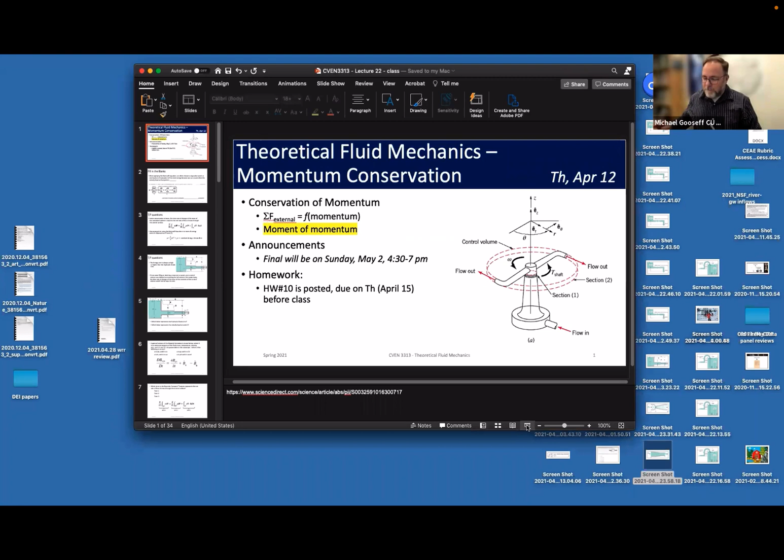Okay, so today we'll mostly... I'll come back to the exam here in a second. So today we'll keep talking about moment of momentum after we get done going through the exam.

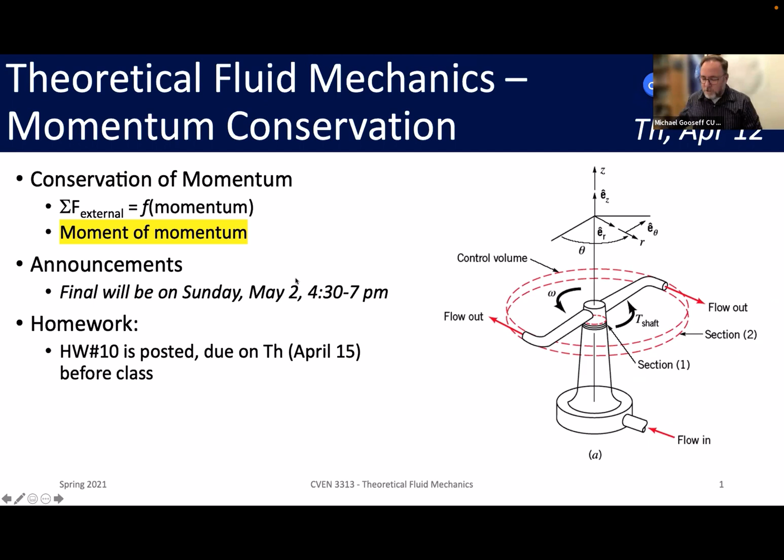Okay, let's see. Well, this kind of works, except I need to... come on now. What happened here? This is weird, now I can't write on this. What happened? Okay, let me try one thing. Oh, there we go, okay. All right, I'm going to go with blue today.

All right, so I'm just going to go through these 18 problems. Remember, you would have only had 10 of them. I can't predict exactly which 10 you had, so I'm just going to go through all of them, and you'll have the benefit of having the ones answered that you had at some point along the way.

I'd say most of these, there wasn't a big problem. One of the issues, let me do this one first in the middle and the second one. These were two different questions, but they had the same graphic with them. The acceleration of a particle is given by the following equation. So this one, the term in dashed outline number 1, right here, is termed the local acceleration. Now, one thing to note: if you typed into the word box 'local acceleration,' the full term, it came up as wrong, because all I was looking for was 'local,' since 'acceleration' was already there.

So I went through and made sure that the things marked wrong were actually wrong. If you had typed local acceleration, hopefully I caught it and gave you the points back. But that's one of the things to check in your exam, just to make sure those are correct.

So I'm checking through these top 10 and then moving on to the other calculation ones, just as a note. A separate question, with the same graphic, asked: if the acceleration of a particle is given by the following equation, the term in dashed outline 2, this one, is termed the convective acceleration.

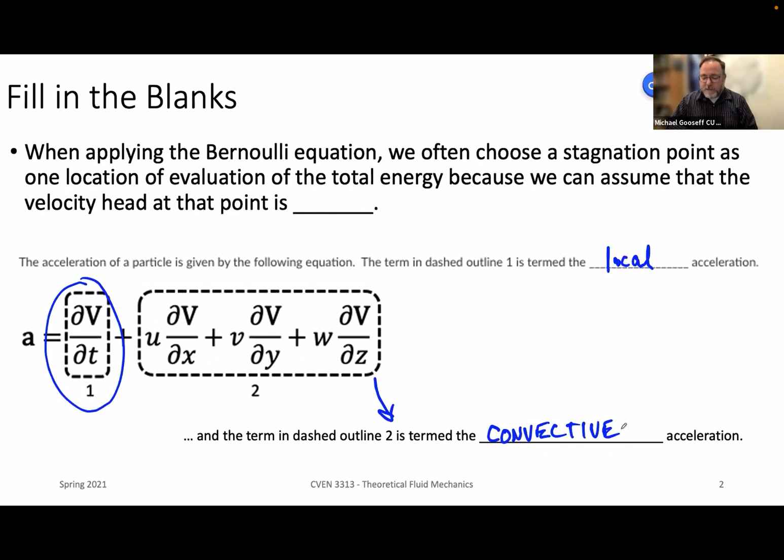And then going back to the first one here, when applying the Bernoulli equation—Christian, do you have a question? Oh, sorry. Oh, okay, all right.

When applying the Bernoulli equation, we often choose a stagnation point as one location of evaluation of the total energy, because we can assume that the velocity head at this point is...

The correct answer to this was 0, or you could have typed out 0. I think both of those were values I had put in as correct answers. Some of you also put 'constant,' and that's not the same as 0, but I might have given 1 out of 2 points for that, something along those lines. Just note that as it comes along.

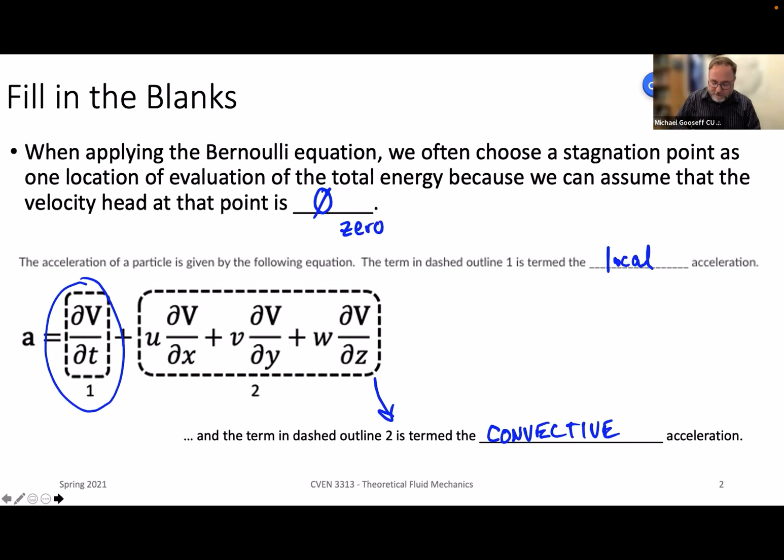All right, true/false questions—there were 4 of these total. These are the first 2; the next 2 are on the next slide.

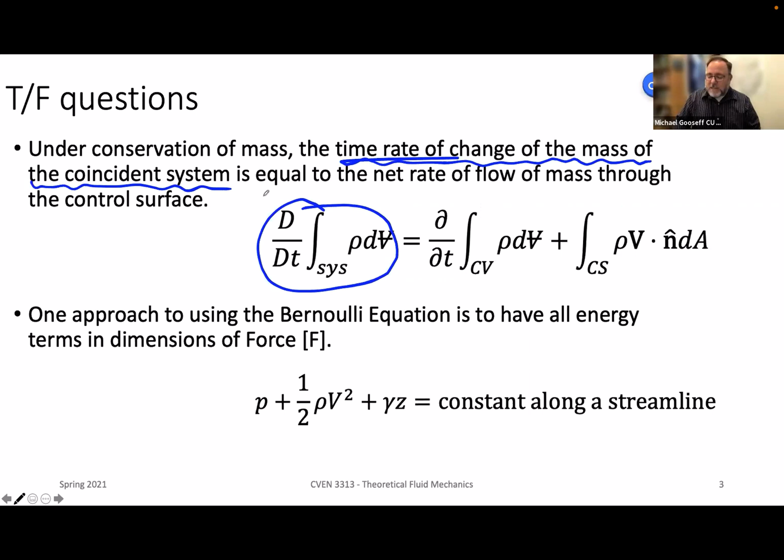Under conservation of mass, the time rate of change of mass of the coincident system—this is the time rate of change of the mass of the coincident system, this piece right here. Those are the words that describe the left-hand side of this equation, the same equation we've been looking at for the past couple of weeks—is equal to the net rate of flow of mass through the control surface, which is this piece right here.

So under conservation of mass, we don't expect any change with time. This would end up being a true statement because you'd expect no change in density with time, no change in storage, so that would be assumed to be 0. I think most of you got that right. If there's some systematic problem I'm not picking up on, let me know and we can talk it through.

One approach to using the Bernoulli equation is to have all energy terms in dimensions of force. I put the F there as a dimension, not as in the answer is false. It turns out the answer is actually false for this one.

Remember we can write this in terms of pressure, which we have right here, and we can also write it in terms of head. The head version is Z plus P over gamma plus V squared over 2g—that's the head version, this is the pressure version. Those are constant along streamlines in either case, just two different versions of the Bernoulli equation, where the translation between the two is basically dividing through by gamma. If you divide p by gamma, you'd get pressure over gamma. If you divide gamma times z by gamma, you just get z, and 1/2 rho v squared divided by gamma gives you v squared over 2g, because gamma is rho times g.

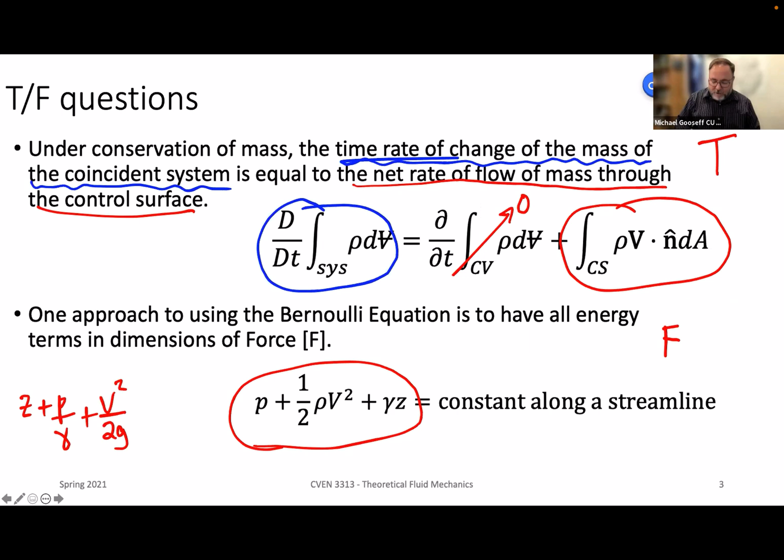But the energy line should never dip below the hydraulic grade line essentially. So this one is true as well. I suppose you could have a negative velocity, I didn't think through that, but anyway, in most systems, this should end up being true.

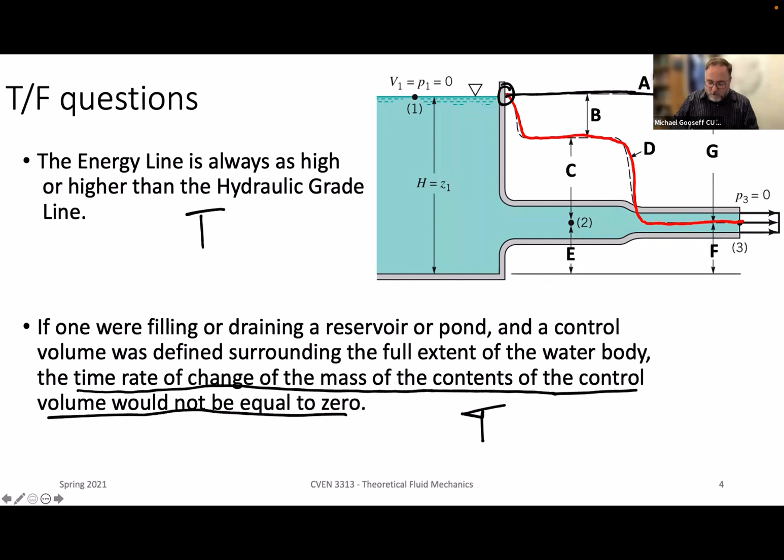There were two different questions that included this graphic, which I showed you previously, but now we specifically look at the answers, basically A through G. The first question was, which letter represents the hydraulic grade line? And the hydraulic grade line is this one right here. The only one that's really identifying that particular line is D.

Then, which letter represents the velocity head at point 2? Here's point 2, and remember the velocity head is the difference between the hydraulic grade line and the energy line, so it turns out that is B in this case. I got a couple of folks that seemed to have a common desire to use G, but that's not point 2, that would be point 3. I'm not quite sure if there was a problem identifying where point 2 was, but in any event, 2 was indicated to be in the larger diameter part of the pipe out of this reservoir.

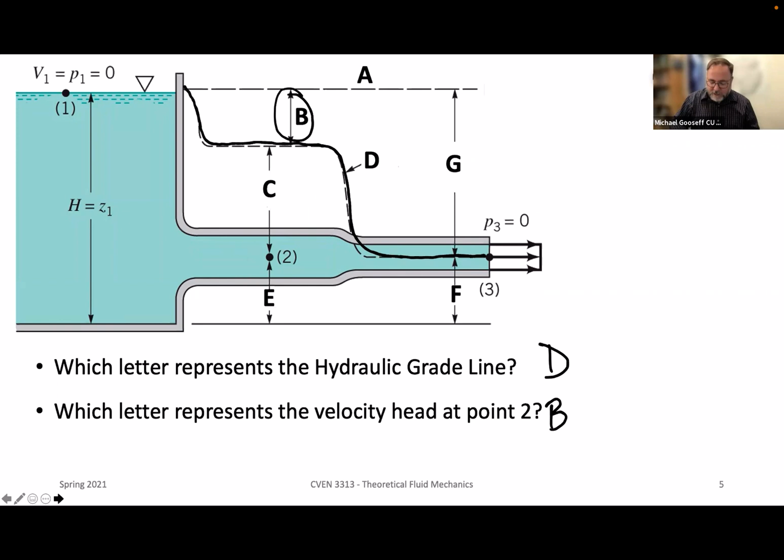This was the graphic that went along with this particular question. The format may look a little bit different, but these are the same answers. I think I took out all the quotation marks you may have seen.

So a general version of the material derivative is shown below, where B is an extensive property of the fluid, so it's mass, temperature, velocity, etc. A and B are placeholders in the subscript, so that's just here and here. Which of the following is correct? A is out, B is in - in other words this would be out, and this would be an in subscript - or A is in and B is out, or should A be sys and B is CV, or is A velocity and B is acceleration.

It turns out, and this just gets back to that fundamental issue that we talked about, where this is derived from that n hat, that normal vector that's always normal, a unit vector always normal to the control surface. Therefore, your outs are added and your ins are subtracted. So this version was the correct answer on that one. That was just getting back to the fundamentals of using the material derivative, which we eventually used to start to define the Reynolds transport theorem, which we'll do in the next slide.

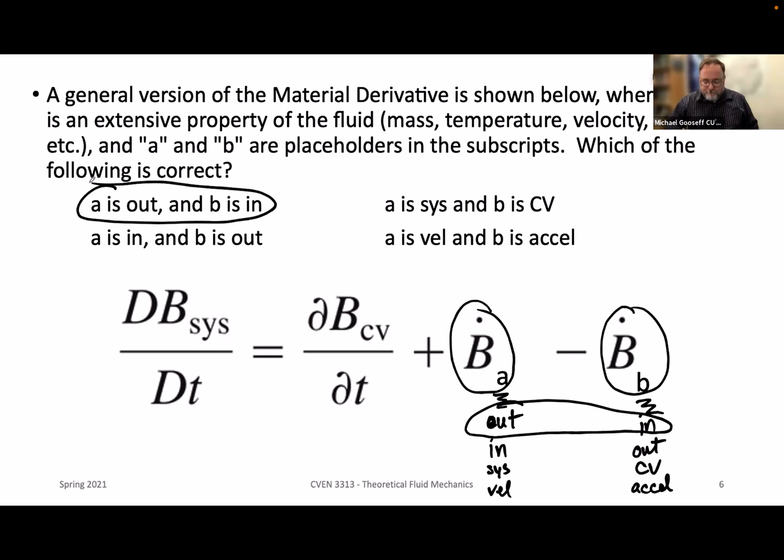On the next slide, we have this question: which term in the Reynolds transport theorem represents the net rate of flow of mass through the control surface? Part of this is given away by using the term control surface. Remember, sys refers to the system, CV is control volume, the control surface is defined here. This is term 3 because remember, this is also that normal unit vector around the entire control surface. So term 3 was the correct answer there - that's the right one for the rate of flow of mass through the control surface.

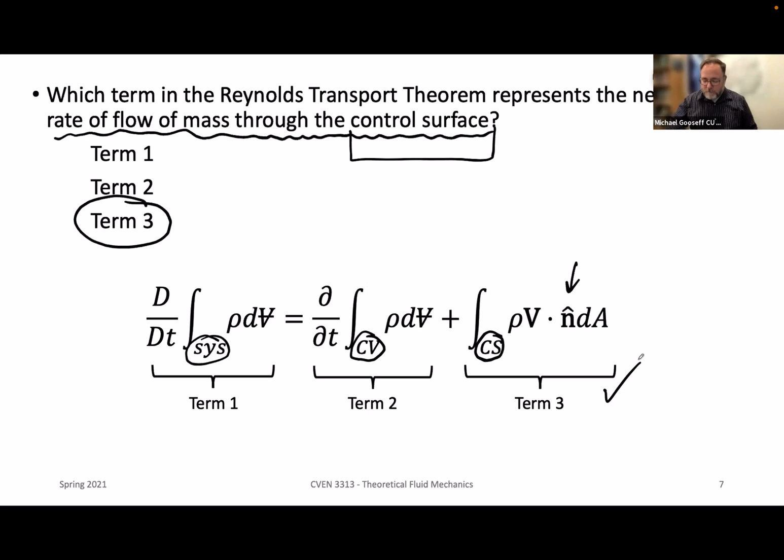This one's slightly different than now.

Which term in the Reynolds transport theorem represents the time rate of change of mass of the coincident system? In this case, we're focusing on the system, so it's term number 1. If we had said something about the control volume, the storage of mass in the control volume, that would be term number 2. But here, we're focused on the system, so we're indicating term 1.

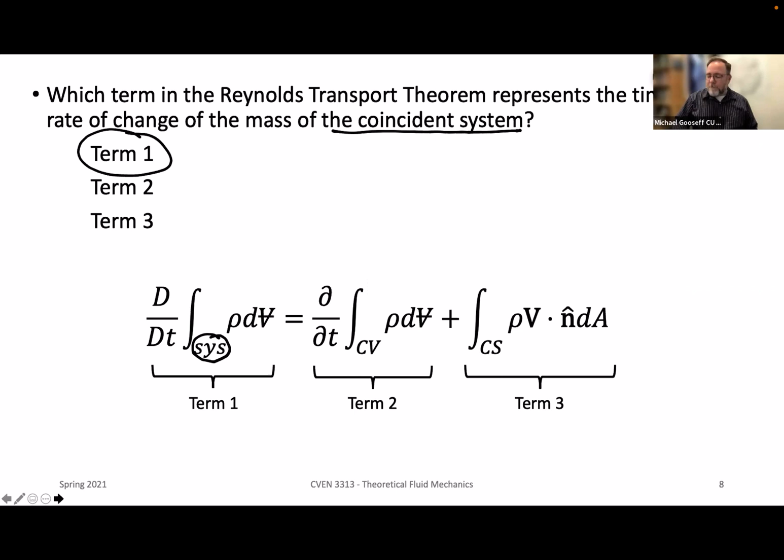Air flows through a doorway at an angle alpha shown in the figure. Which is the correct expression for the mass flow rate, the m dot term? I couldn't put an actual m with a dot on it in Canvas, so I used m dash dot. I hope that was not unclear. This is the mass flow rate of air through the doorway.

If we were to apply the Reynolds transport theorem, remember that we need to look at normal fluxes, that is, fluxes that are perpendicular. Even though this is at some angle alpha from the wall, this in or out flux, we don't know whether it's going in or out, what our frame of reference is.

But regardless, what we're going to need is the normal component. Think about this vector as having that direction and that direction. Given alpha, we care about this component right here, which means we would look at rho times A times V, and then we would only really be looking at the sine of alpha. In other words, the normal component, the component perpendicular to the doorway. That's where the trig comes in here—it's not just rho times A times V, because we have this going at an angle, we need to look at the perpendicular component to that.

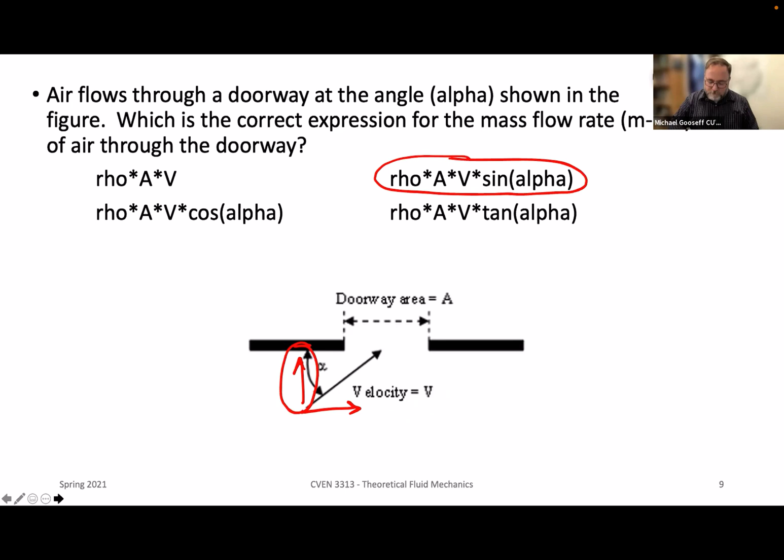You were given this graphic. Again, I had to make these graphics in PowerPoint, do a screen capture, and then upload that as an image to Canvas. You're given a velocity vector of minus 23i plus 1.7j plus 0k. Because this is 0k, we can basically say there's nothing going on in that z direction. Therefore, this ends up just being a two-dimensional velocity vector. I mean, we show the k, but because it's 0, this ends up being a two-dimensional flow, essentially a two-dimensional velocity.

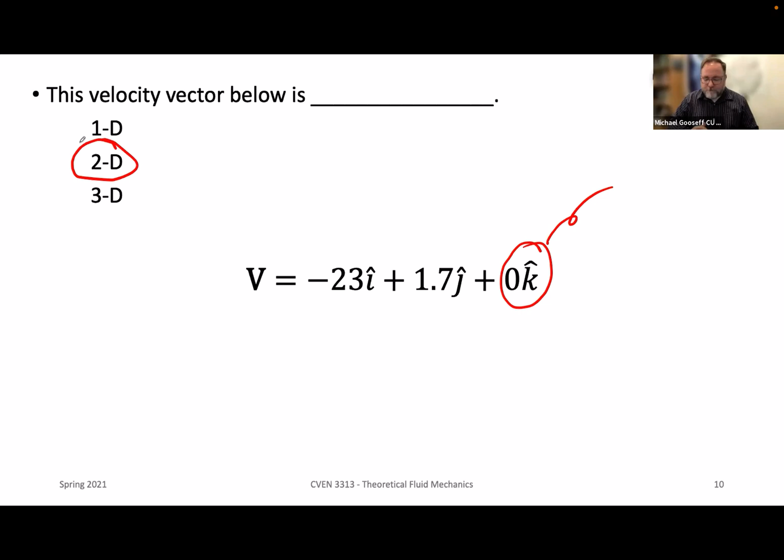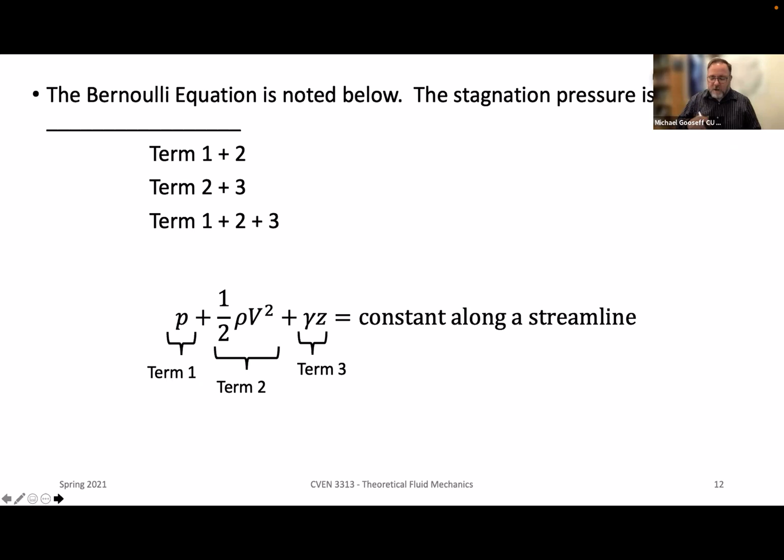So the static pressure is denoted as that P value in this version of the Bernoulli equation. And then the stagnation pressure, remember, is the one that we used for that stagnation point right in front of a manometer that's coming out into the flow.

In this case, it's actually both of these terms summed together. So term 1 and 2 make up what we call the stagnation pressure, because you've got some amount of the velocity head acting against, or velocity energy. Here it's represented as a pressure, not a head, but this pressure is pushing against that opening to that manometer. So that stagnation point has these two acting to push water up that manometer, or whatever the fluid is.

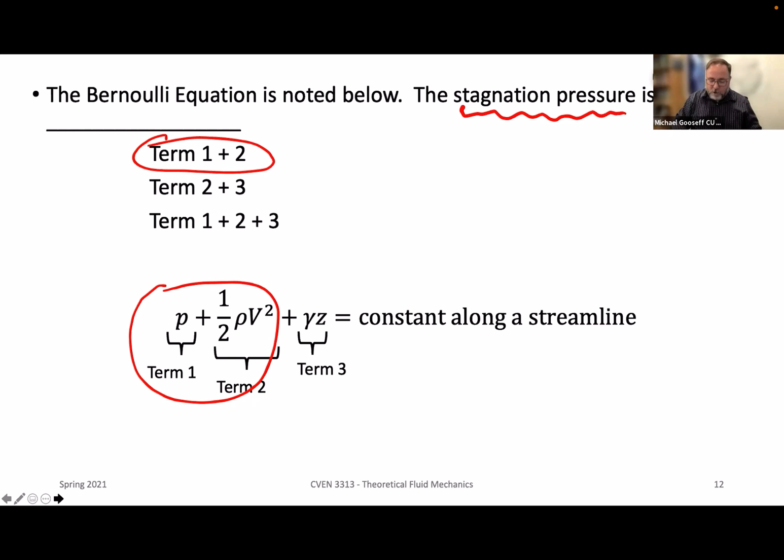Water flows without friction through a horizontal pipe that enters a section where the cross-sectional area is small. Here's point number 1, here's point number 2. The velocity profile is uniform in sections 1 and 2. The correct statement about the static pressure P2 relative to P1, and velocity V2 relative to V1 along the streamline down the center of the pipe, is what?

Before we go through these, let's note that given gravity is downward, Z1 we expect is equal to Z2. So if we think about this in terms of Bernoulli, I'll just write out the equation: Z1 plus P1 over gamma plus V1 squared over 2G is going to be equal to Z2 plus P2 over gamma plus V2 squared over 2G.

We know that Z1 and Z2 are basically the same, so they'll cancel out on either side of this, which means that if velocity changes—if velocity decreases from point 1 to point 2—then pressure has to increase. These two are sort of offsetting each other.

So a decrease from V1 to V2 means an increase from P1 to P2, and vice versa. How are V1 and V2 related? In this case, this is a larger cross section than this one at point 1. Therefore, if A1 is greater than A2, then we know V1 has to be less than V2, right from Q1 equals Q2. We're lumping in a bit of the continuity equation here, and therefore the pressure.

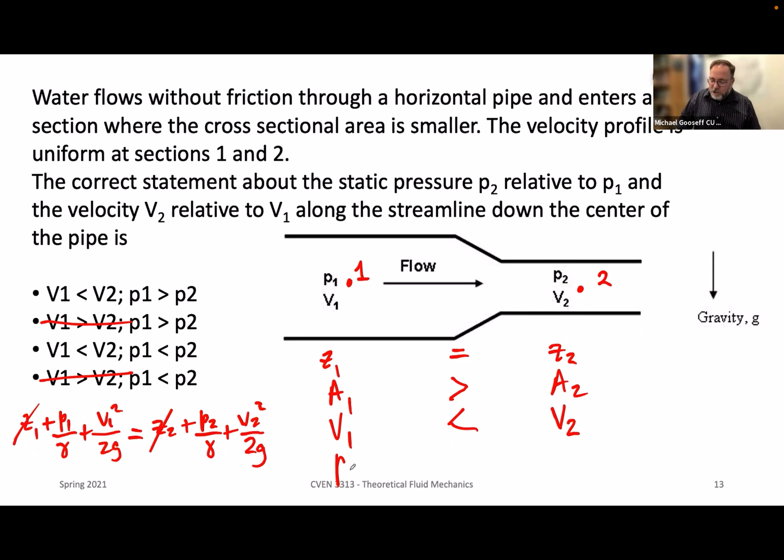So for V1 being less than V2, we can ignore this one and that one. So now what happens with pressure? If velocity increases from 1 to 2, then pressure has to decrease from 1 to 2. So V1 is less than V2, P1 is greater than P2. That's the correct answer here. We can reason through just the relative amounts of these without getting into specific numbers, simply because we can estimate what these relative changes are in the system.

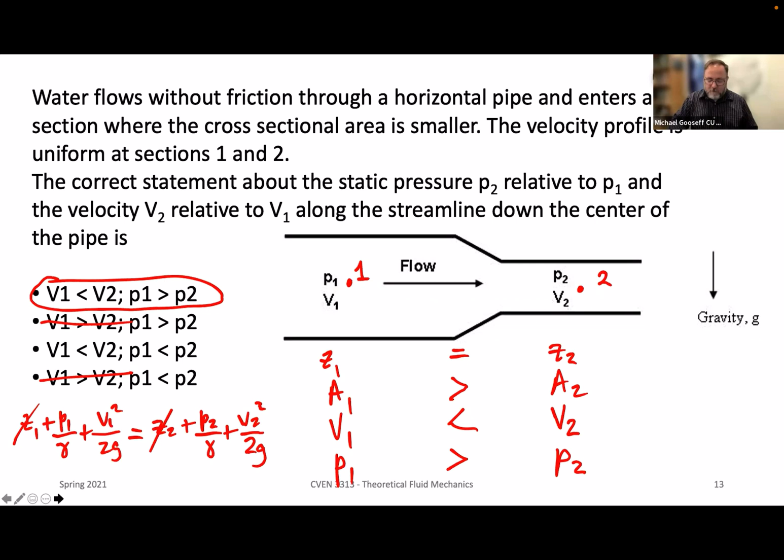In the figure below, water flows through this constriction. At which location is the velocity the greatest and the pressure the least? Well, let's just say A1 here is greater than A2, which is less than A3. So for the same amount of discharge Q moving through this—in this case we're told it's water, but as long as it's an incompressible fluid—we would expect that V1 is less than V2.

We just, sorry, I goofed that up. This should be V2 is greater than V3. We don't know how 1 and 3 relate to each other, but in this case, point number 2 has to be the greatest velocity, simply because it has to increase from 1 to 2, and then from 2 to 3, working our way back out from small to large cross-sectional area, velocity has to drop from 2 to 3. So the greatest velocity has to be point number 2.

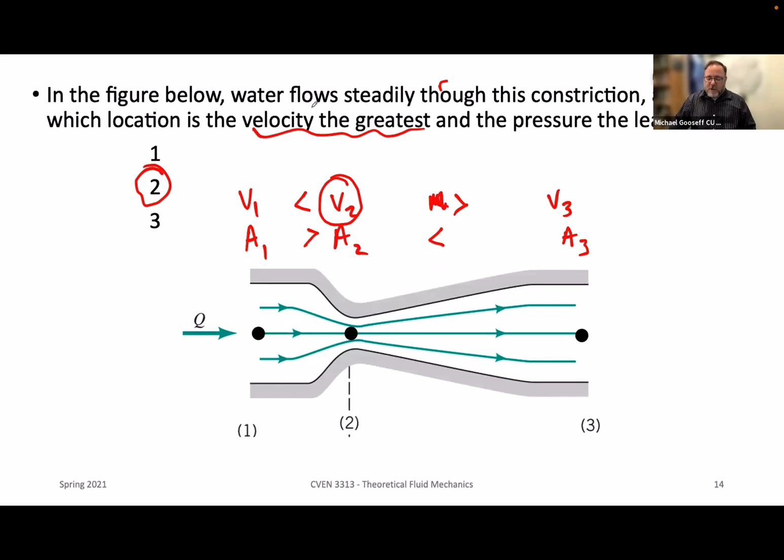Now, we also said where is pressure the least? That goes back to the previous example, where if we assumed all of these are the same z value, we could reasonably conclude that pressure must be least where the velocity is greatest. We could take that a step further, but really just the velocity being the greatest among these 3 points is enough for us to answer this question.

Okay, so that covers the multiple choice, true/false, fill in the blank questions from the first part of the exam. Again, that was 20% of the exam overall. Then this section is 30%, and all of you had some version of this problem, where I hope this wasn't too confusing. I did get a couple questions on it, but it was meant to be a 2-part question: the first part is just using the Bernoulli equation to figure out the velocity of the water exiting the pipe back into the reservoir, and the second part was to determine the diameter of the supply pipe that meets this requirement.

So in other words, using the continuity equation to size the pipe more or less correctly. Assume the water tower has one pipe going from its base to the tank, so it can either fill or drain. When the water tower is half full, the free surface is 95 feet above the reservoir surface. The design specifications require that when the tank is half full, it can be drained back to supply at a flow rate of 2,210 cubic feet per minute. Assume that water flows freely at the end of the pipe into the surface of the reservoir.

So I was trying to be careful not to invoke the jet idea necessarily. It turns out that equation would have worked, but I also was trying not to confuse you and make you think the pipe went down into the reservoir and was submerged somewhere. The idea was it just comes out at this elevation. You can consider that 0 compared to the 95 feet at the top of the water surface. If losses are neglected, what diameter must the supply pipe be?

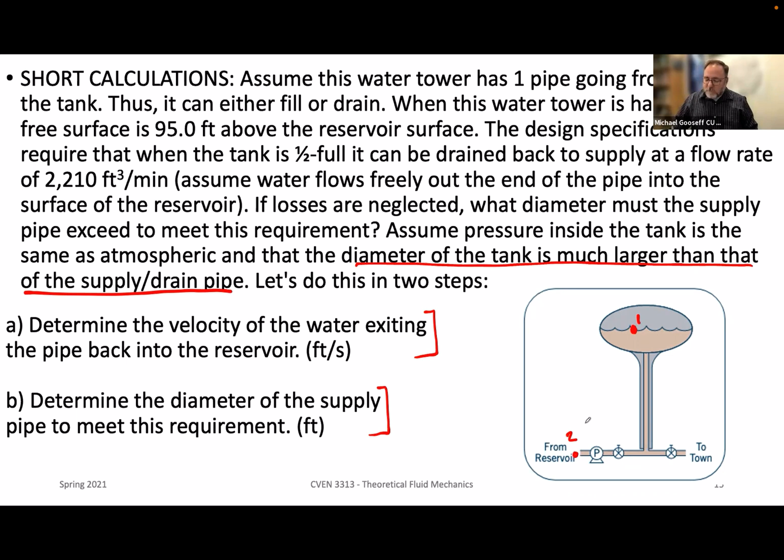So we can answer this in 2 steps. The idea was that with terms like the diameter of the tank is much larger than that of the pipe, that would suggest that if this is point number 1 and this is point number 2, V1 is equal to 0.

And then we also note the pressure inside the tank is the same as atmospheric, that means P1 is also equal to 0. And then, of course, we are shooting back into the atmosphere, this water at the end of the pipe here, so P2 is going to be equal to 0 as well. So that's some simplification. We also can assume Z2 is equal to 0, and Z1 then is defined by the problem to be 95 feet in this case.

So your numbers may have been different, but you go through the same process. We have a Z offset, we don't know what V2 is, we can solve for that with the Bernoulli equation, we'll do that on the next slide. Then we can go back to basically Q - we're given a volumetric flow rate that we can figure out what the cross-sectional area needs to be to have the velocity we figure out in part A.

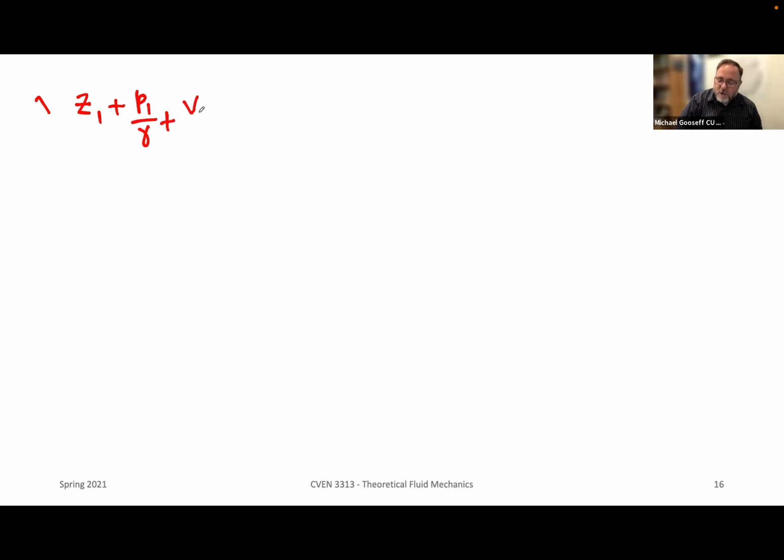So for part A, we apply the Bernoulli equation. Z1 plus P1 over gamma plus V1 squared over 2G is equal to Z2 plus P2 over gamma plus V2 squared over 2G. Okay, so we said P2 is 0, we said P1 is 0, we said V1 is 0, and Z2 is equal to 0.

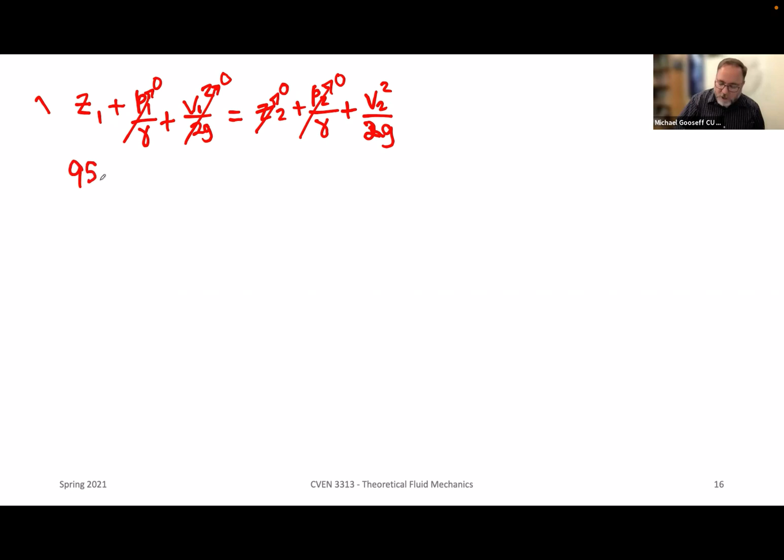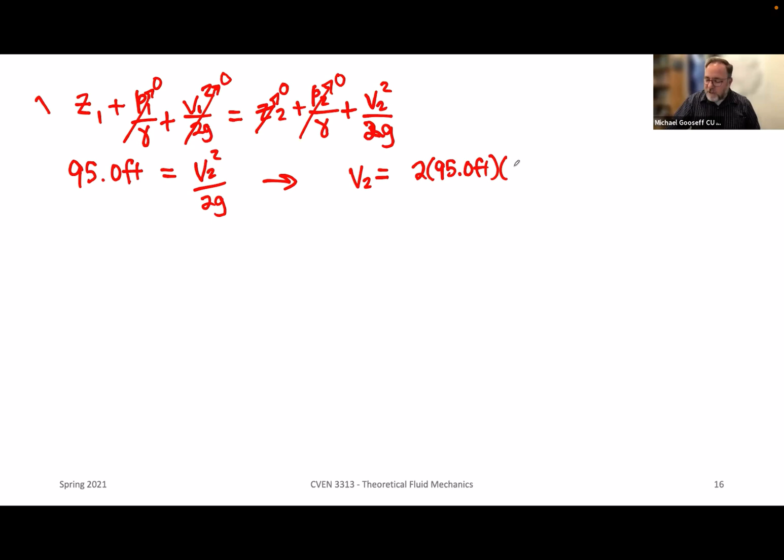Z1 is our 95. So 95 feet is equal to V2 squared over 2G. And so this looks a lot like the free jet equation. V2 is going to be equal to the square root of 2 times 95 feet, multiplied by G, and G in feet is 32.2 feet per second squared. When you do that math, you should come up with 78.2 feet per second.

Okay, so that's just a relationship based on energy - taking 95 feet of potential energy and converting it to kinetic energy. That's part A. Part B is what's the pipe diameter we need?

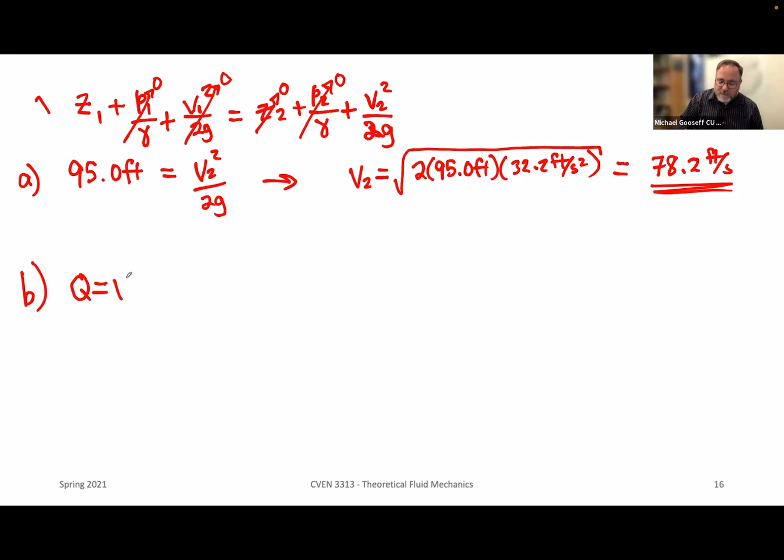So Q, of course, is equal to V times A, and we're told that this can go out at 2,210 cubic feet per minute. So the question then is, what diameter do we need? This is equal to 78.2 feet per second times pi over 4, times the diameter of the pipe squared.

So we can solve for D as being equal to 2210 feet cubed per minute divided by - let's see, I need to do my conversion there. Since my velocity is in feet per second here, 1 minute is equal to 60 seconds.

And then we divide by 78.2 feet per second. Over here, I'm just going to multiply by the inverse of that ratio, 4 over pi. I take the square root of this whole thing, and that comes out to be 0.774 feet.

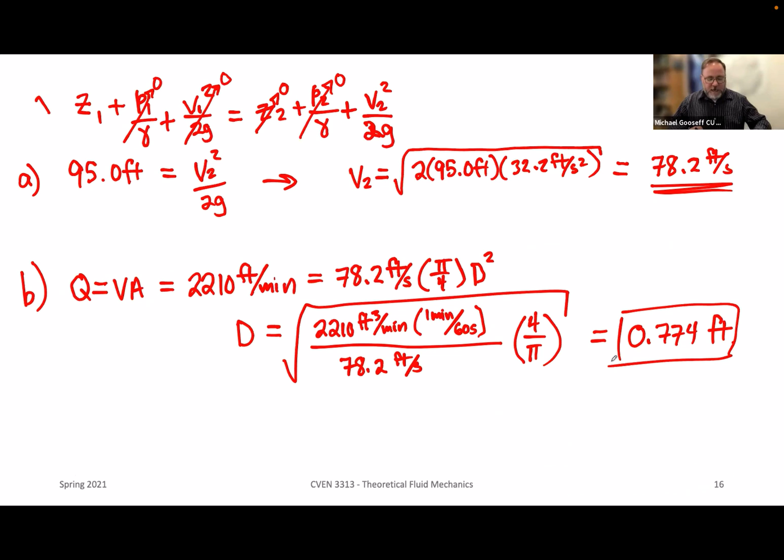I saw something moving in the chat. It was just about how if people got different heights for the same question. Oh right, there were 5 different heights. So this is just the process you go through.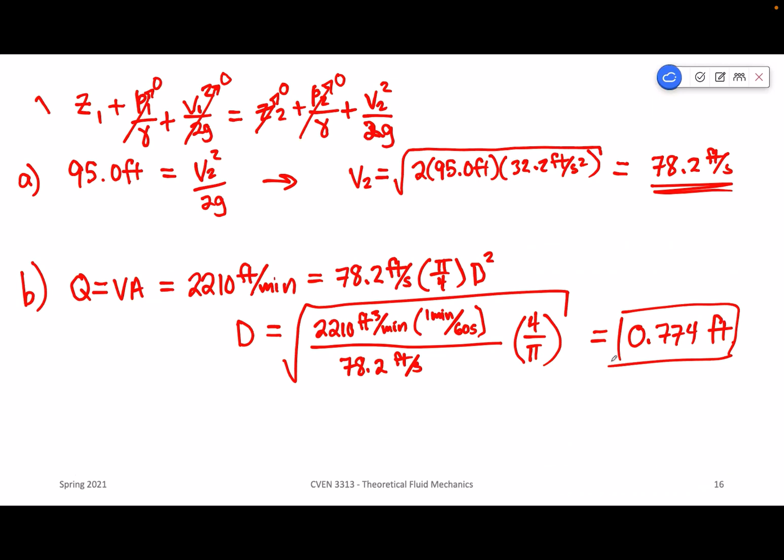Yeah, so you can come back to this when you get to your exam if you want to look at how you solved it versus the way it should be solved. Okay, here's the one error that I had - this should have been meters per second squared. So my apologies for that, instead of meters squared per second. This should have been meters per second squared.

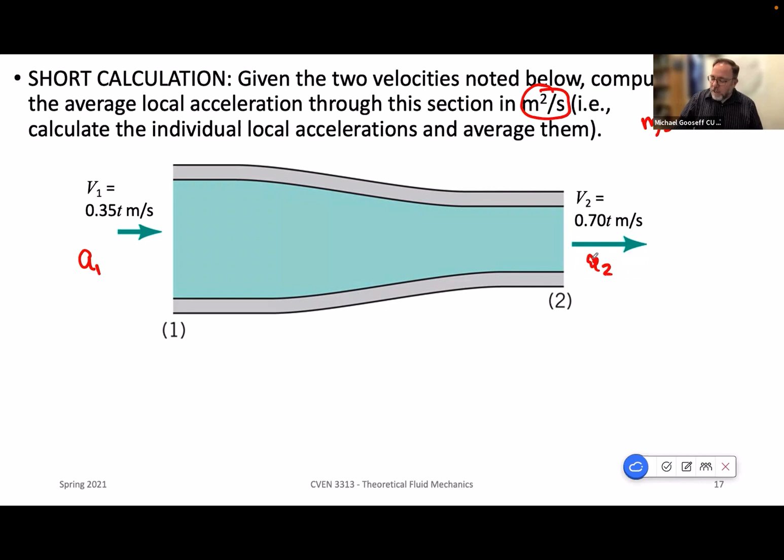It doesn't change your answer all that much, because basically what you're being asked for here is: you're given 2 velocities noted below, compute the average local acceleration through this section. So the average local acceleration is basically figuring out the acceleration at 1 and the acceleration at 2 and taking the average of those 2.

Okay, so in this case, A1 is equal to dV1/dt. And again, there were 5 different versions of this, so you may have had different numbers, but this would be d/dt of 0.35t. So that equals just 0.35. And acceleration number 2 is just that simple as well.

dV2/dt is equal to d/dt of 0.70t. So that comes out to be 0.70. Okay, so we're just going to take the average of these two. So this is 0.35 plus 0. Apologies, I dropped the units there. I didn't keep the units in, but because it was meters per second, this comes out to be meters per second squared, right? And this should also be meters per second squared when we look at the temporal derivative of these two. So 0.35 plus 0.70, this is in meters per second squared, divided by 2, we come up with a value of 0.53 meters per second squared. That was just meant to quiz your notion of how acceleration is related to velocity.

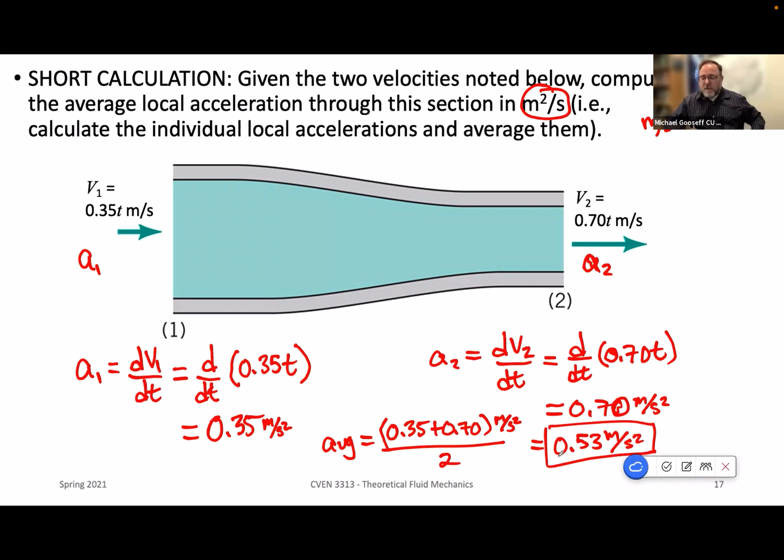And in this case, you just had to take the average of those two values, these two ends of this particular constriction. Okay, that was my workspace for that one.

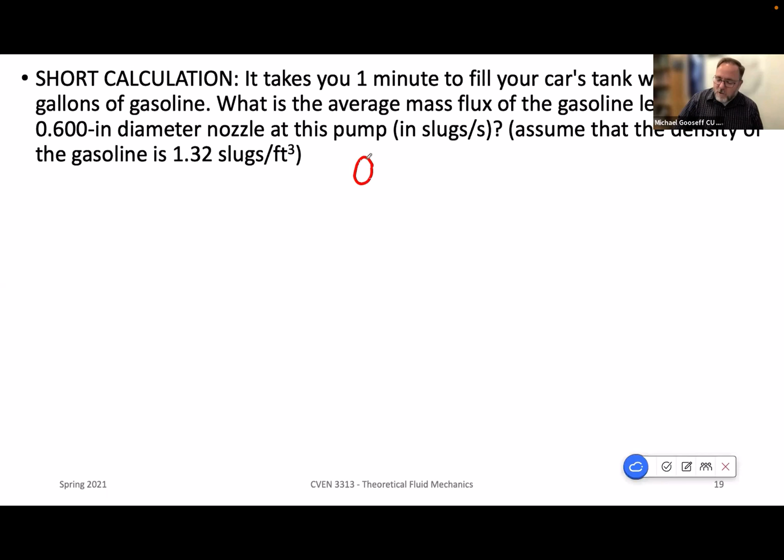All right, next short calculation. It takes you 1 minute to fill your car's tank with 9 gallons of gasoline. So we can think about that as a flow rate. Q is equal to volume, 9 gallons, divided by a rate of 1 minute, or I'm just going to put this in terms of 60 seconds because I expect I'll have to work in seconds. So gallons per second, we don't always use that often.

So we could convert that maybe to cubic feet. That's usually a little more useful to us. And 1 foot cubed is equivalent to 7.48 gallons. So then this comes out to be 0.0200 feet cubed per second. Okay, so I'm not quite sure exactly where we're going here, but I started by recognizing that we've been given a time and a volume, so I can come up with a flow rate.

What is the average mass flux of gasoline leaving the 0.600 inch diameter nozzle at this pump in slugs per second? Assume the density of gasoline is 1.32 slugs per cubic foot. Okay, this is basically asking what is m dot. And we know that m dot in general is rho times Q. So in this case, we call it rho gas times Q gas. So this was the Q gasoline.

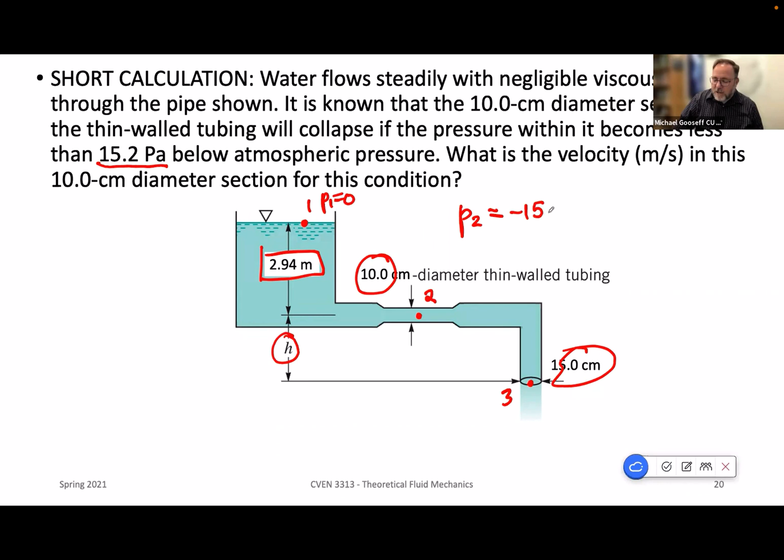Okay, I'm going to write out the full Bernoulli equation and show how we can simplify it to solve this problem. Note that we are given essentially that P2 is equal to 15.2 pascals below atmospheric pressure. So if P1 is equal to 0, then P2 is equal to minus 15.2, and a pascal, remember, is newtons per meter squared. That's going to go into our equation as well.

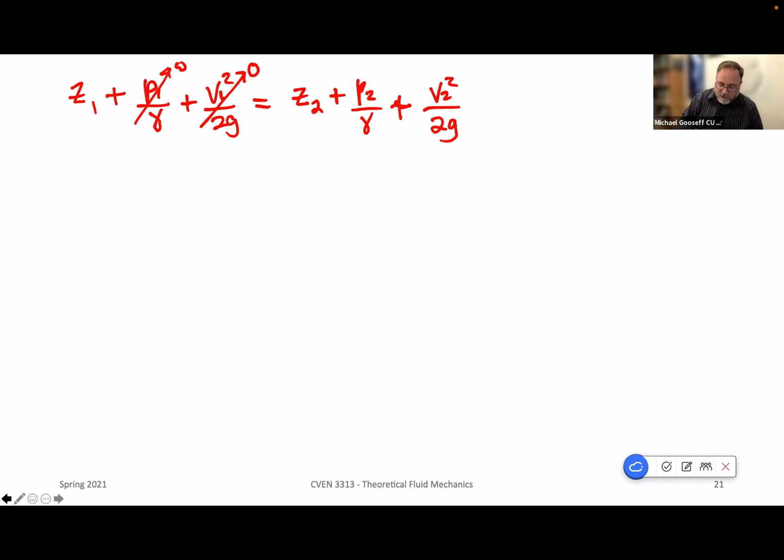On the next slide, we've got our good old friend Bernoulli here: Z1 plus P1 over gamma plus V1 squared over 2G is equal to Z2 plus P2 over gamma plus V2 squared over 2G. So for starters, at point number 1, we know that the pressure is 0 because we're at atmospheric at the top of that reservoir on the left. The velocity there should also be equal to 0. And it's got some height, so Z1 is equal to 2.94 meters, the vertical distance between point 2 and point number 1. So Z1 is 2.94 meters, and on the right-hand side, relative to that, Z2 is equal to 0.

We are given the pressure, so we'll plug that in here. And we're actually looking for V2, that's our goal. So this is now equal to a minus 15.2 newtons per meter squared divided by gamma for water, which is 9810 newtons per meter cubed, plus V2 squared over 2 times 9.81 meters per second squared. So we should be able to solve this now.

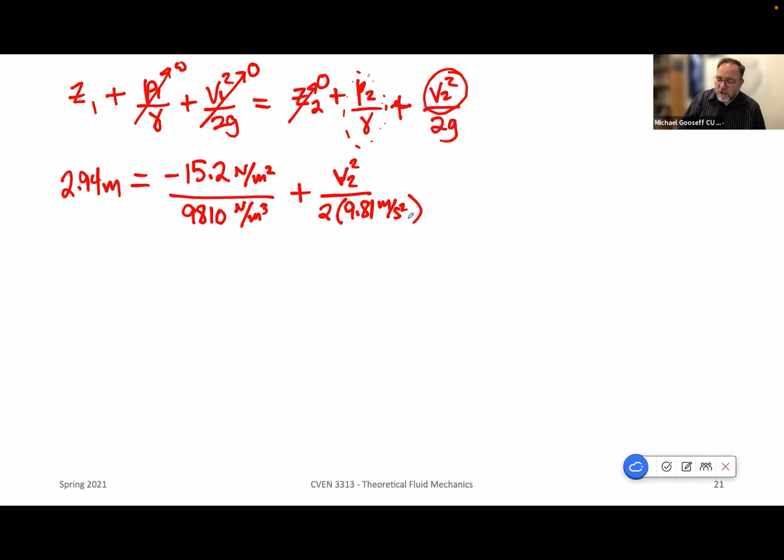So basically what we get is V2 is equal to 2 times 2.94 meters plus, if I take this ratio right here, I get 0.00155 meters. Now why did that become positive? Because it was negative over here. When I move it to the left-hand side to isolate my velocity, it becomes positive. So we've added those two heads together, multiplied by 2. Now I need to multiply by G, 9.81 meters per second squared, the acceleration due to gravity, and then take the square root of the whole thing.

Just one thing I want you to note, look at how small this velocity head is - it's not that big. I'm sorry, the pressure head, the negative pressure head, compared to this elevation head. In this case, it doesn't take much negative pressure for that constriction of that material to buckle in the way that it's proven here.

So V2 then comes out to be a value of 7.60 meters per second, and note that there's no negative left in this at all. The fact that this was negative on the right-hand side, it moved over to the left, it became an addition, and we're not at some negative velocity or anything like that. Now, one way you could have gone wrong is if you didn't take the square root. If you were in a hurry, it's possible you got a number that is 7.6 times this - I think it's 57 point something, or somewhere in the 50s.

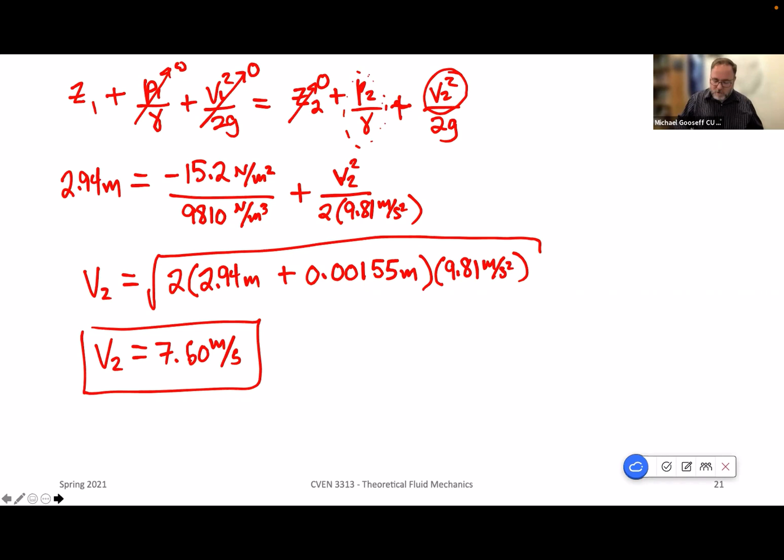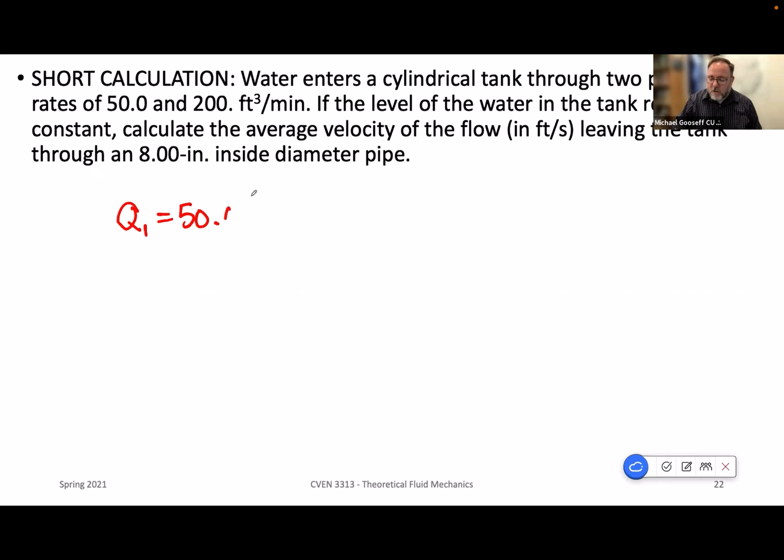Water enters a cylindrical tank through two pipes at rates of Q1 equal to 50.0 cubic feet per minute, and we're given a Q2 as well, also an inflow, 200 feet cubed per minute. If the level of the water in the tank remains constant, calculate the average velocity of the flow in feet per second leaving the tank through an 8-inch inside diameter pipe.

So Q3 is an outflow, and that's going to be equal to some V3 times A3. And the other thing we know is that Q1 as one inflow plus Q2 as another inflow is equal to Q3, because we said that the level of the water in the tank remains constant - in other words, there's no change in storage. So Q3 has to equal essentially 250 cubic feet per minute.

So I won't bore you with that math, but 250 feet cubed per minute is equal to - now we're being asked for the velocity, so we simply take V3 on the right-hand side and divide by A3, pi over 4, and we're given that the diameter is 8 inches, so 8 over 12 feet, and we take that value and square it. So V3, when we do this math, comes out to be 716.2 feet per minute.

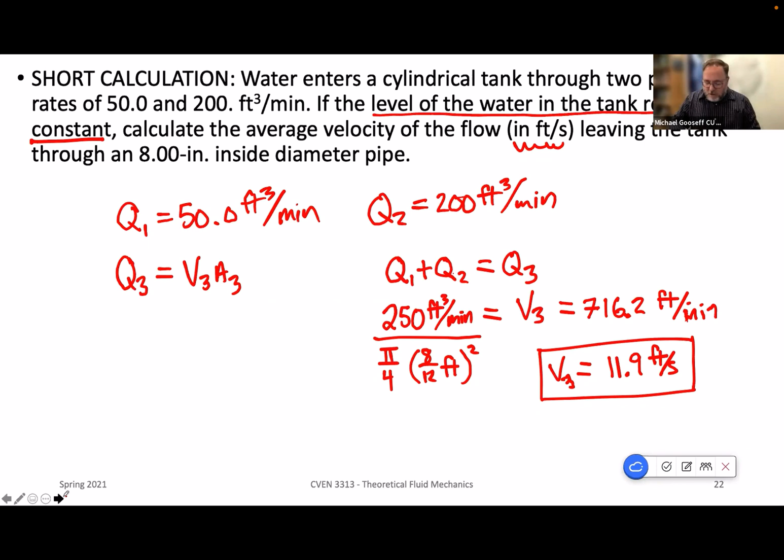Okay, so that one's pretty straightforward, mostly making use of the continuity equation. With a density that didn't change, we can just work with the volumes. Those were the two short calculations.

So this one was focused on the Bernoulli equation. The very last one is completely focused on using what we call the mass flux, or mass balance.

We have water coming out through this hose, being siphoned over this hump. The hump is 2.1 feet above the water surface, and the outlet is 3.5 feet below the water surface. The total depth here is 8.55 feet.

We're asked for a number of things: what is the velocity in the hose, what is the pressure at point 1, what is the pressure at point 2, and what is the pressure at point 3?

Note that I've given you the hint that the pressure at point 3 is less than atmospheric. From a manometry perspective, you might have been tempted to say the pressure inside this tube at point 3 is the same as the pressure outside, which would be 0 at the surface.

The reason manometry doesn't work here is simply because we have water moving in this tube. It's not a static tube. If it was static, we could come up with that relationship, but it's not static.

The other thing I noted was that at point number 2, we assumed this is just inside the tubing—not on the outside—so flow is moving. There is the same velocity coming out here as at this location. We're just told it's a 2-inch diameter hose, with no information about changes, so if it's the same diameter all the way through, the velocity along the entire length has to be the same.

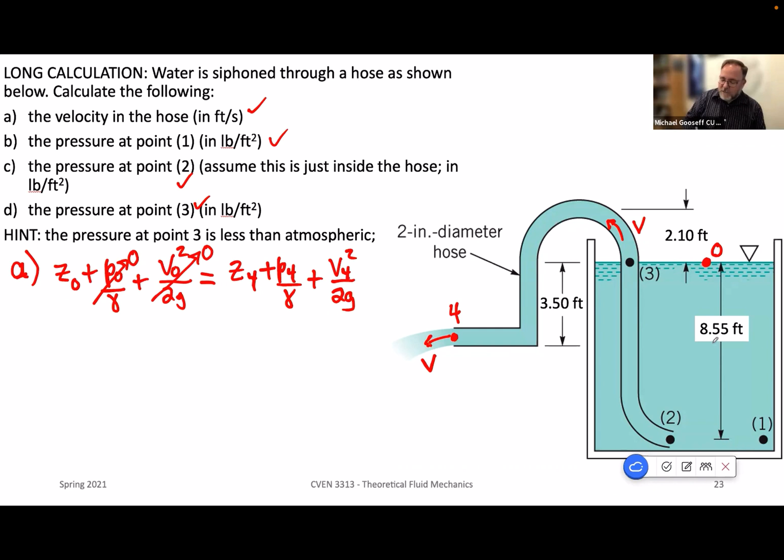So Z0 plus P0 over gamma plus V0 squared over 2G is equal to Z4 plus P4 over gamma plus V4 squared over 2G. We expect the velocity at 0 is 0, and the pressure at 0 is also equal to 0, but the elevation is 8.55. I'm going to use the base here as my datum, so 8.55 feet is all we're left with on the left-hand side.

On the right-hand side, we now have Z4, which is 8.55 minus 3.5—that's the elevation above the datum. Then P4 is equal to 0 because we're going out into the atmosphere, and then we have plus V4 squared over 2G.

This is more or less the jet problem again, where we solve for V4. When we move these to the other side, we get 2 times 32.2 feet per second squared times 3.5 feet, and taking the square root of this whole product, we end up with V4 equal to 15.0 feet per second.

Now real quick, I had 3 sig figs, 3 sig figs, 3 sig figs—looks like I've got 3 all the way around, so I can stick with 3 sig figs in my solution there as well.

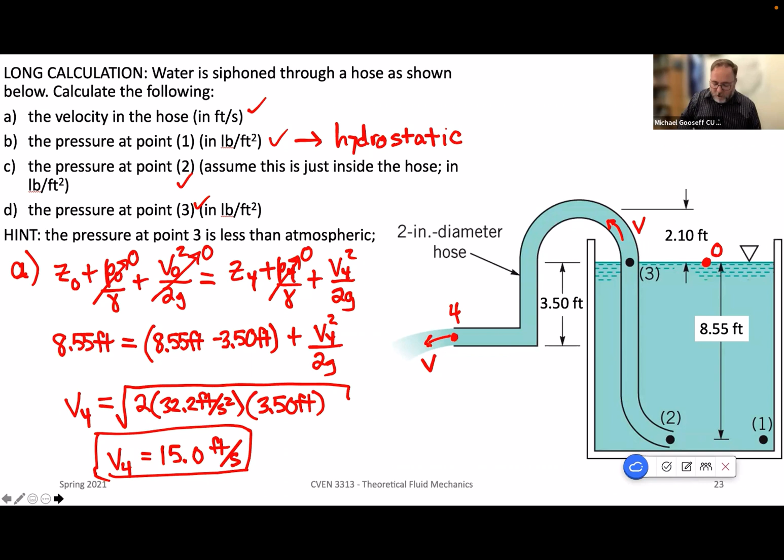Part of the reason I thought it was important to calculate this is to compare it to what you get at point 2, because point 2 is just inside this tube where things are moving. They're at the same elevation, more or less, but you'll have two different pressure values. So let's take a look at what we get at point number 1, which is the pressure at that point.

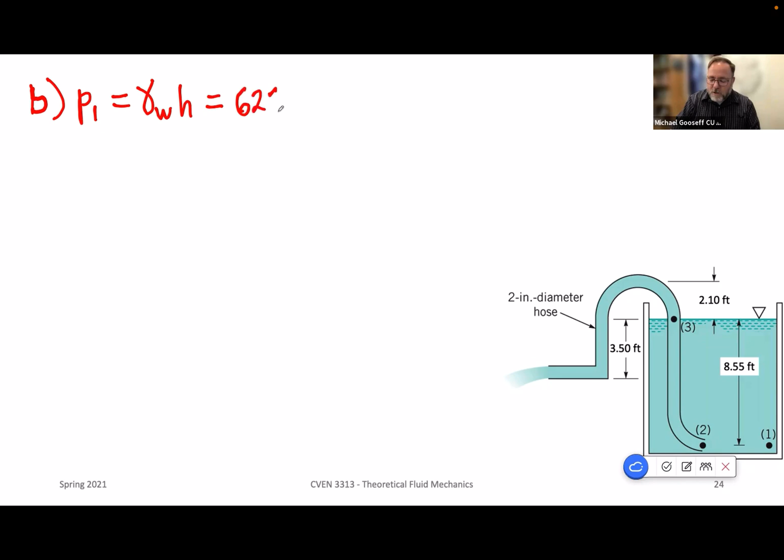Pressure at 1 is hydrostatic, so it's simply gamma water times some height h of water above that point. In this case, it's 8.55 feet. In English units, we have 62.4 pounds per foot cubed, multiplied by 8.55 feet, and we come up with 534 pounds per foot squared.

The other thing I tried to do to save you guys time was ask for all these in pounds per square foot, so you didn't have to do the conversion to PSI. So at the bottom, we have 534 pounds per square foot of pressure acting. What happens at where P2 occurred? What is P2? In this case, we can't use hydrostatics because we're inside this hose and the water is moving.

So we need to use the energy equation. We could do this a couple of ways: go from 0 to here, or go through the tubing and out. I'm going to choose to apply it from 2 to 4, since this was point 0 up here. You should also be able to go from 0 to 2 to get here as well.

Let's apply the Bernoulli equation at 2 and at 4. So Z2 plus P2 over gamma plus V2 squared over 2G is equal to Z4 plus P4 over gamma plus V4 squared over 2G.

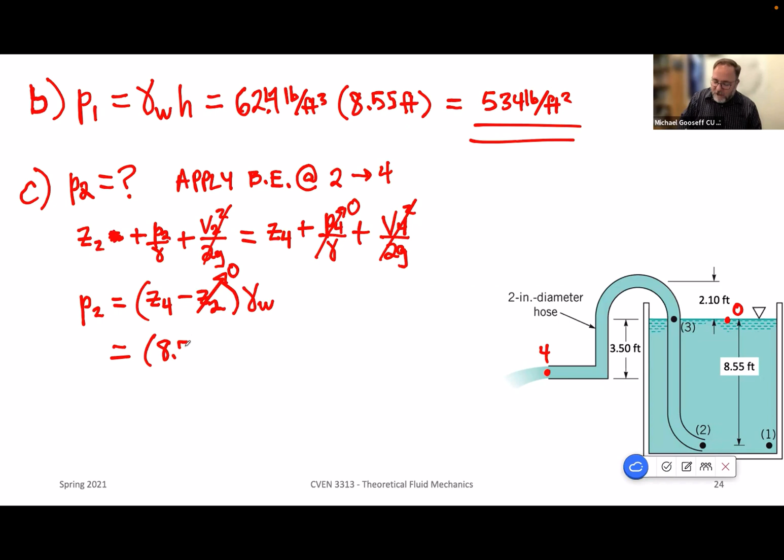So this comes out to be Z4, which I don't have a height for, so I'll just calculate it as 8.55 feet minus 3.5 feet, and when we multiply by 62.4 pounds per foot cubed, I end up with P2 being equal to 315 pounds per foot squared.

That's supposed to be pounds. So one thing to note: we calculated 534 for the static pressure, and here we have 315. The reason we have 315 and not 534 is that we've taken some of that pressure energy and converted it to kinetic energy, the moving water through the tube, even though the elevations are basically identical.

Part D is just asking us for the pressure at point number 3, and I gave you the hint that pressure at 3 is less than atmospheric pressure, meaning it's going to come out negative. So once again, we can apply the Bernoulli equation between 3 and 2, or 3 and 4, or even 3 to 0 or 3 to 1 if we want. I'm going to apply it between 3 and 4.

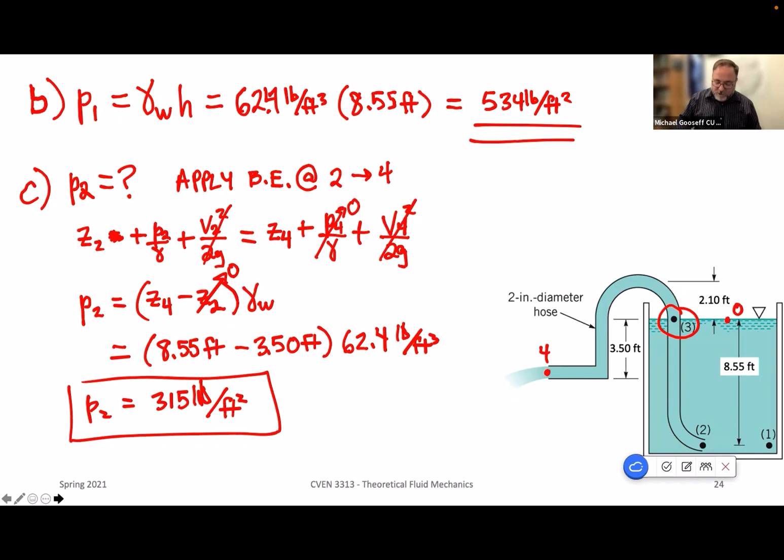Once again, we calculated the velocities through this entire hose, and those two velocity heads are going to be identical because it's the same velocity, so they'll cancel on each side of the equation. So for part D, we can apply the Bernoulli equation at 3 and 4.

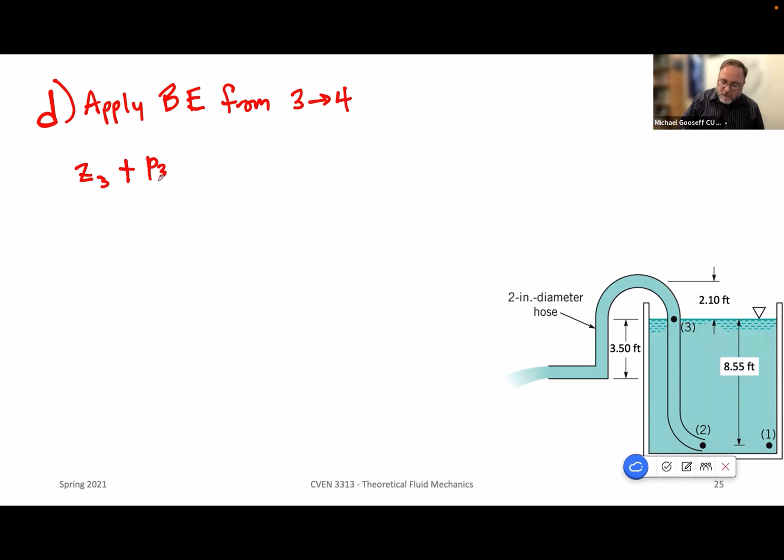So now we have Z3 plus P3 over gamma plus V3 squared over 2G is equal to Z4 plus P4 over gamma, which of course is equal to 0, plus V4 squared over 2G. Again, V4 and V3 are the same, so those cancel on each side of this equation.

So now we can basically calculate that Z3 is equal to... well, we could do this a slightly different way. The difference between 3 and 4, putting 4 back in here and 0 right here, is the difference between 3 and 4. So Z3 minus Z4 is equal to 3.5 feet.

So P3 is equal to gamma times Z4 minus Z3, so ultimately minus 3.5 feet. And so we come up with a minus 3.5 times 62.4 pounds per foot cubed. And we end up with P3 being equal to negative 218 pounds per foot squared. Does that make sense?

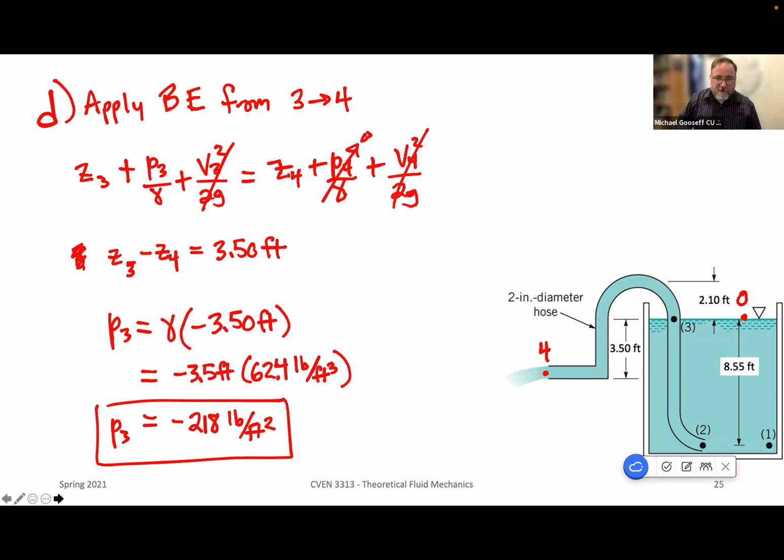So this whole question was really just focused on how we apply the Bernoulli equation in a couple of different ways. Now the last problem, if you recognize this, you have good recognition, because this came from recitation in week 11. This was the first problem we worked on. Essentially this is all about m.1 being equal to m.2 plus m.3. In other words, we have one incoming m dot and two outgoing, m.2 and m.3 going out. So let's just work through these real quick.

This is the left-hand side of the Reynolds transport equation. Determine the quantity where this change of the system in time, where the system is carbon tetrachloride contained in the pipe bounded by sections 1, 2, and 3. In other words, just trying to identify what our control volume would be. And it turns out, from the system perspective, this should always be equal to 0. We've said that the left-hand side of this equation, there's no change in mass through time. Our system always keeps the same amount of mass, so A is always going to be 0.

Now the questions start to get at what is the mass flow rate at section 1? So this is the inflow, so m.1 is equal to rho times Q1, which is equal to A1 times V1. We are given that the mean velocity at 1 is 22.5, the area is 0.5, so this comes out to be 22.5 feet per second times 0.50 feet squared.

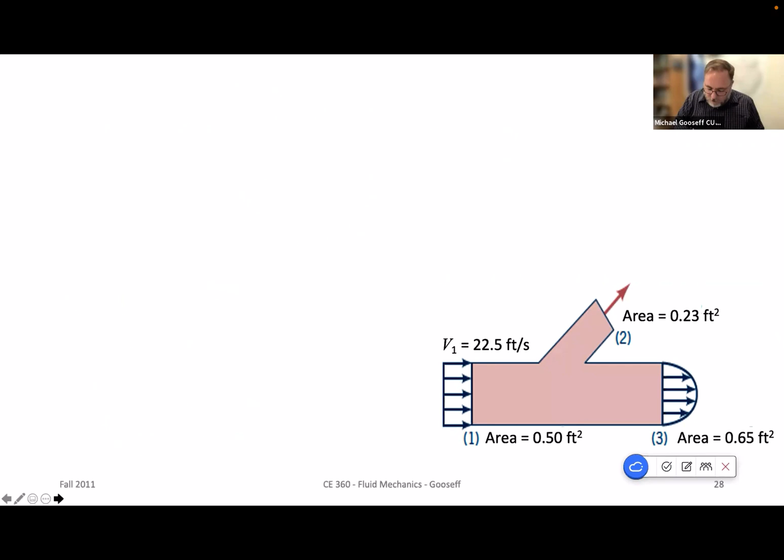Okay, so a rotating lawn sprinkler along with a control volume is shown below. There is no friction force at the surface between the rotating arm and the base, and the air resistance force is 0. The velocity of the water entering the sprinkler is V in, and the relative velocity of the water leaving the sprinkler is W out. The question is, what is the momentum equation for the sprinkler with no zero terms present?

Is it m dot r naught times W out, where W out is the sprinkler relative velocity, equal to the torque shaft, the shaft torque? Or do we need to account for the angular velocity at one of these points? And this one also includes some conservation of momentum, the moment of momentum of the inflowing water as well. Take a look at those and decide which one you think makes the most sense.

All right, we're up to 66. Let's take a look here. How many do we have? 80, so we should get a few more. Let this go for another minute and a half.

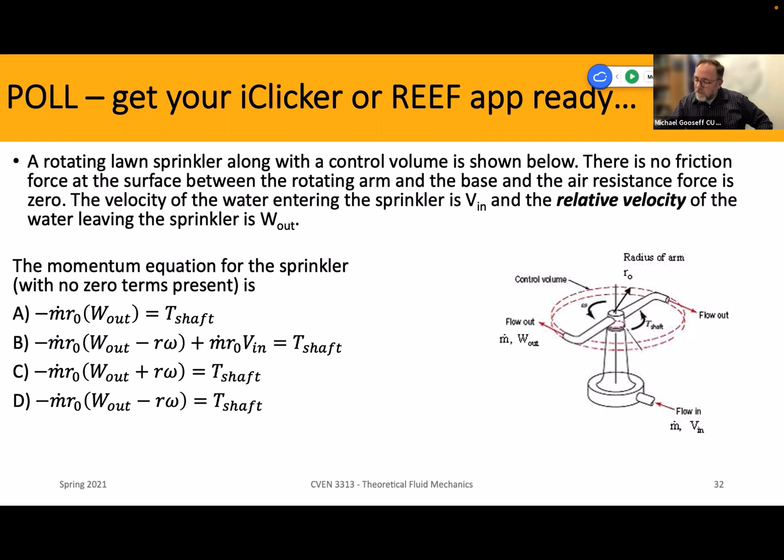All right, 9 of you chose A, 11 chose B, 18 chose C, and 35 chose D, and D is the correct answer. This is right because essentially we're looking at how V, or in this case W, works. We've got these two going in opposite directions. The relative velocity of the water leaving is opposite the direction of the turning of the shaft and the arms themselves.

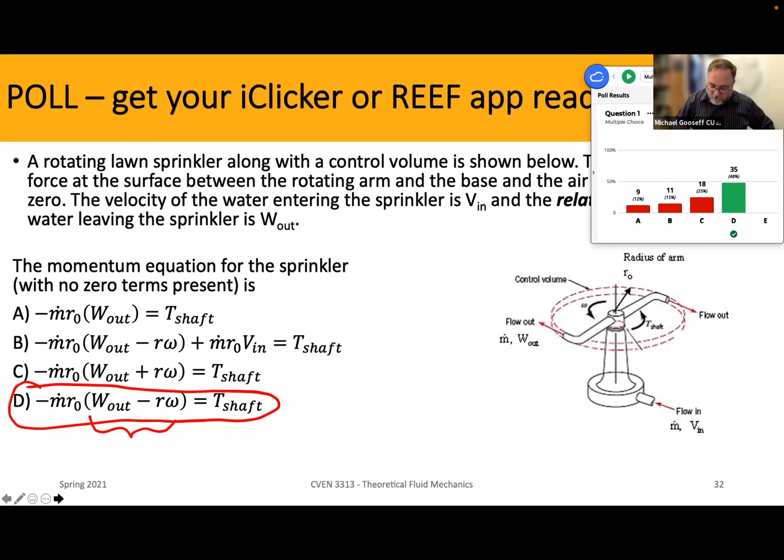Okay, great, looking good. All right, next one looks very similar. Let me reset this. Now we're looking at the relative velocity, but now the momentum equation for the sprinkler looks like this. When we have a lawn sprinkler as the control volume shown below, the torque is large enough that the sprinkler arm does not move, so now we're looking for a resisting torque.

Okay, so let's get this going. I'll let you guys go for a minute and a half here. We might go a bit over, so my apologies for that. Now we have V in, and the relative velocity of the water leaving the sprinkler is W out, but omega is equal to 0. So which one of these is working for us? Do we subtract, do we add? And this is also including the inflowing moment of momentum as well.

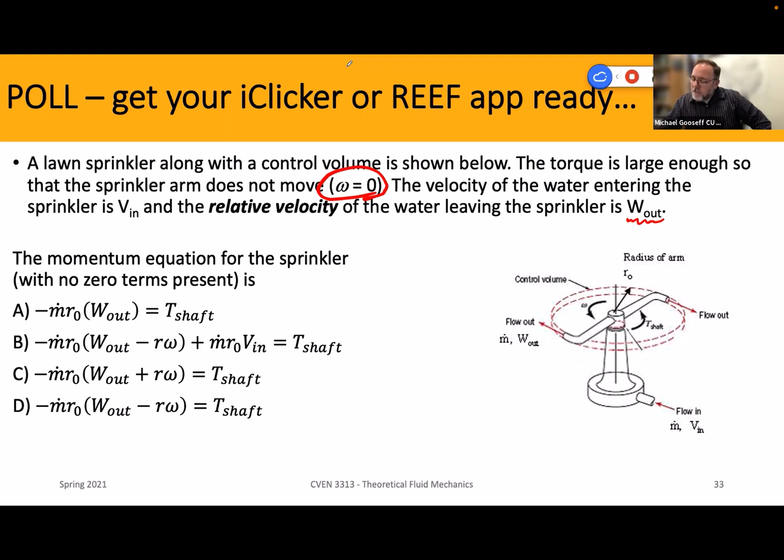All right, I think that might be all. Let's see what we've got. Okay, most of you said A, and it turns out that is actually the correct answer. The reason here is that any of these that included the angular component, omega is 0, so that component would have fallen out, which leaves us with this particular answer.

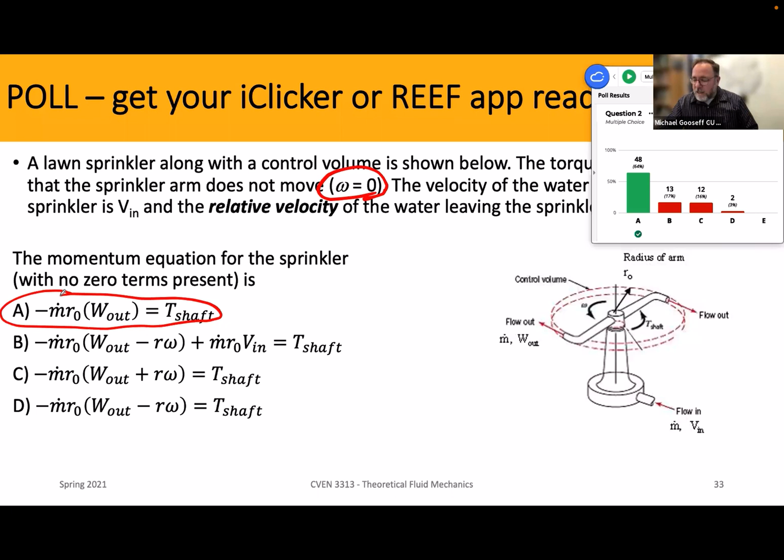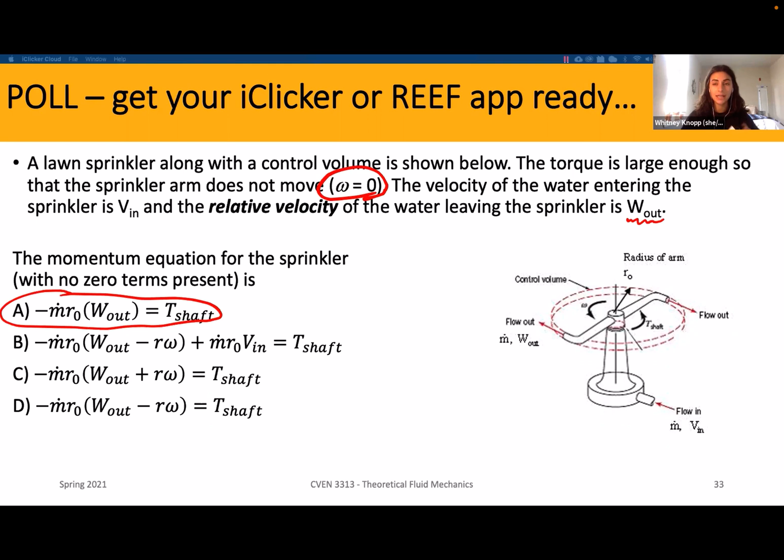I do have one question that I was wondering if you could maybe go back to. Sure. Okay, so it was one of the short response ones, the one with the water tank. I was just wondering if you could explain why both of the pressures are 0.

See if I can get back to it. This is slow.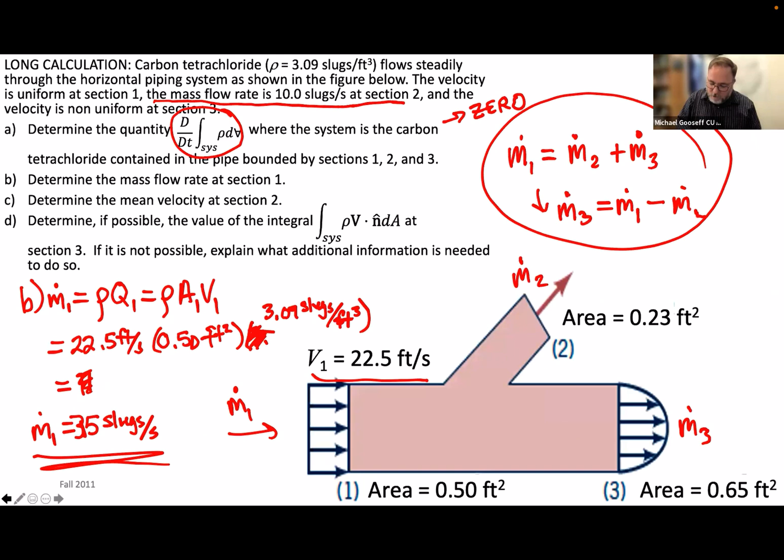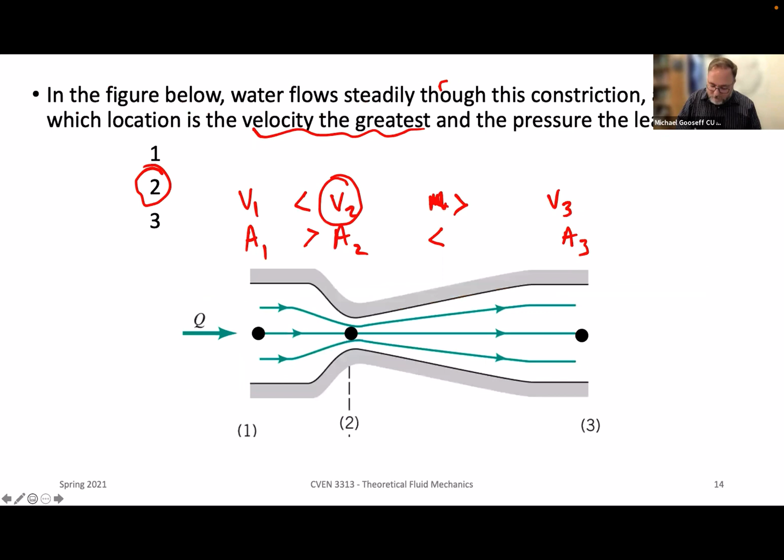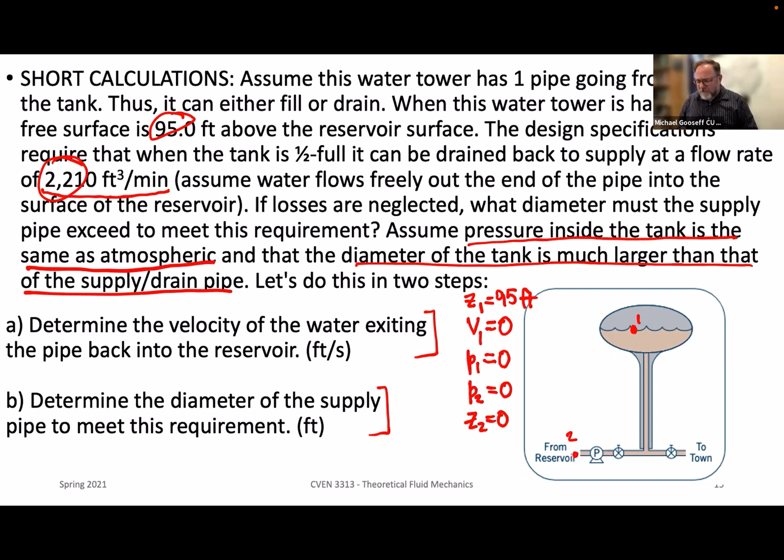That kind of language is really key in these kinds of questions, because with the first part, I think I might have just set my point 2 at an incorrect place, because I was getting a different pressure for that. Well, you also may have had different numbers - there was another version with 88, another with 85, and so forth. Okay, cool, thank you.

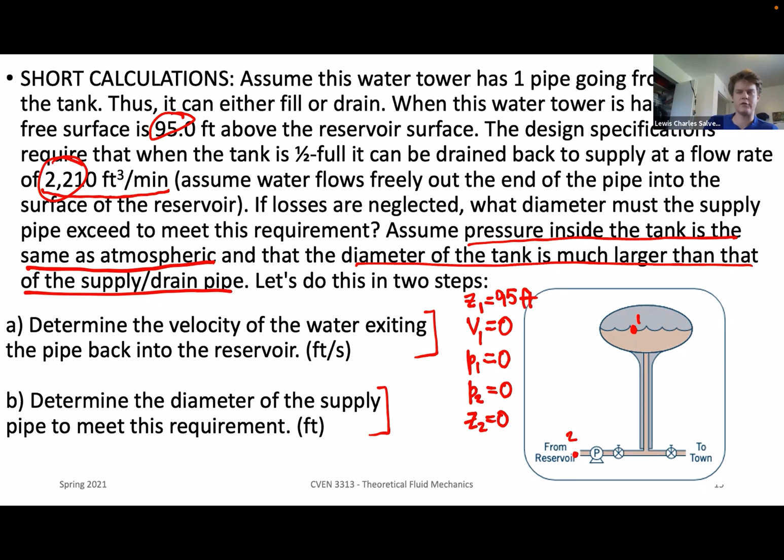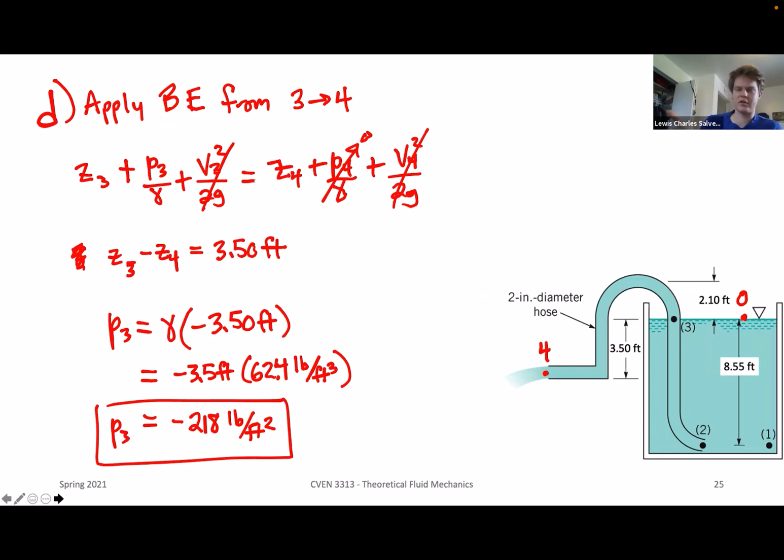Oh sorry, I didn't go far enough. I was used to that, saying control surface instead of, or CS instead of system - is that interchangeable? Oh, I did not catch that until today. That was actually a typo in the definition, so thanks for bringing that up. That was supposed to be control surface. Let me look at the way I stated it.

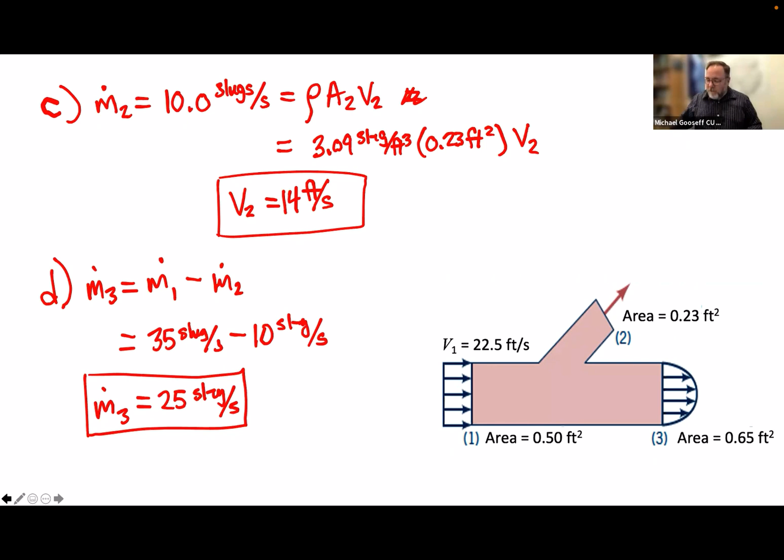So I ran into a problem where this was also a graphic, because I couldn't find a way in Canvas to basically put in an equation. So what I ended up doing was typing it all out in PowerPoint and taking a screenshot. But I think what happened was - sorry, let me go back real quick, I got my eyes tested this morning and apparently I need new glasses - I think what I did here was I copied. Note that the top one has that integral sys.

I either copied that one and then tried to modify it for this one, but you're right, this should have been CS. So my apologies if that threw you off when you were working this one out. I approached it like it was a system - I was like, okay, you can't look at just point 3 and have it be the whole system, so I said it wasn't possible.

That was thrown in as sort of a suggestion in Part D anyway. Well, thanks, Lewis, let me just make a note real quick.

Shoot, let me do one thing here. Okay Lewis, for some reason your name isn't popping up - what's your last name? Salvins. It always puts my middle name in, I don't know why, I can change it. Okay, no worries, but can you spell that for me? Salveson. Okay perfect, yeah let me take a look at that then, because that was definitely a mistake on my part. So okay, thanks for that.

Yeah, no, I have a pretty detailed explanation of it, and it was rather confusing for me. No, understandable, and I did not notice that until today - I was sort of looking through going, where did that system come from? So yeah, thanks for that. All right, thank you, have a good one. You too.

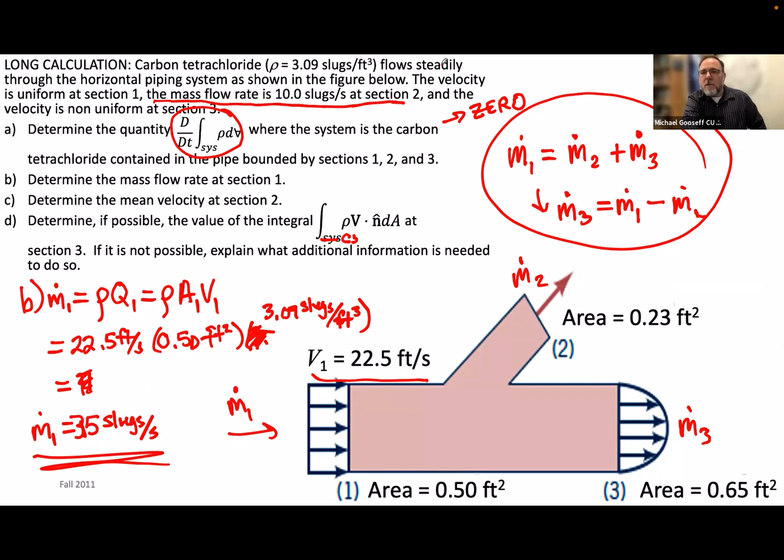Saeed, did you have a question? Or anyone left? Michael? Mohammed? Anyone? Okay, I guess not. Professor, I had a question. Oh okay, yeah Mohammed, go ahead.

So about the final, is it going to be cumulative? Is it going to contain all the topics we had from the beginning of the test to the end? Yeah, it will emphasize - I haven't figured out the design exactly, I started to rough it out already, but it will emphasize starting from linear momentum, though it will include a little bit before that as well. So think about it this way: I think we're going to have 4 long problems, 2 of those from linear momentum on, and 2 from previous material - one from the first midterm and one from the second midterm, 2 from everything since the second midterm.

And then it's going to be like 10 multiple choice, 6 short answer, and 4 long answer - is it going to be something like that? I haven't quite figured it out, I think...